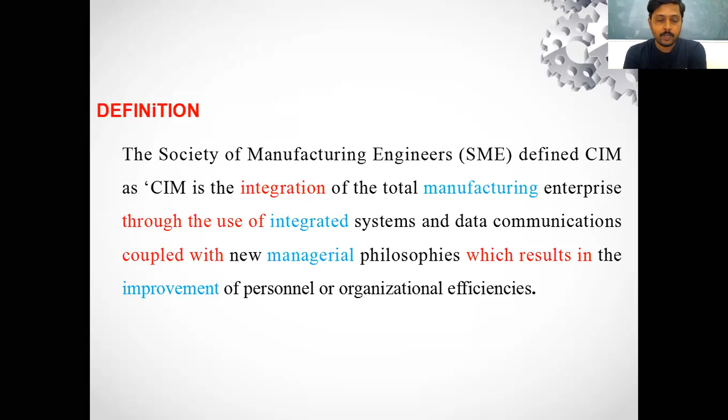So it depicts that it could be used in service industry also, not only in manufacturing industry. Personnel means the staff, working people in the industry. The efficiency of that personnel could be improved, or overall organization efficiency as a manufacturing unit could be improved. So this is the definition of CIM. If you understand this definition clearly, you are going to have a good knowledge of CIM and how to implement it.

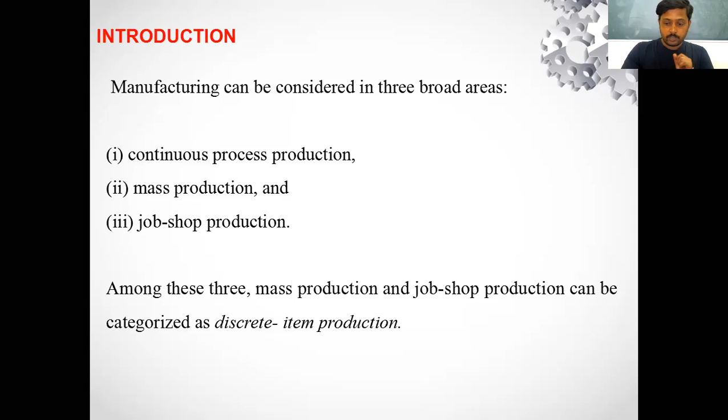Now let's move further. The continuous flow process cannot be automated fully. The first type, continuous flow process, cannot be automated fully, as it only consists of a small percentage of the manufacturing system. Keep this in mind. You can consider the batch production or continuous flow process system as a system which has a small percentage of manufacturing automated.

The second type, mass production of discrete items, is included in this category, where a segment of the production line is largely automated, but not the entire line. In the first case, a small percentage was automated. In mass production, a segment of the production line, which is more than a small percentage, is automated, but not the entire line.

Now in the third case, the job shop facilities have automated machines, but transfer of work among these machines is a difficult task. So we can say that job shop production can be totally automated from raw material to the finished product, but the transfer of work from one workstation to another is a difficult task in case of the job shop facility system.

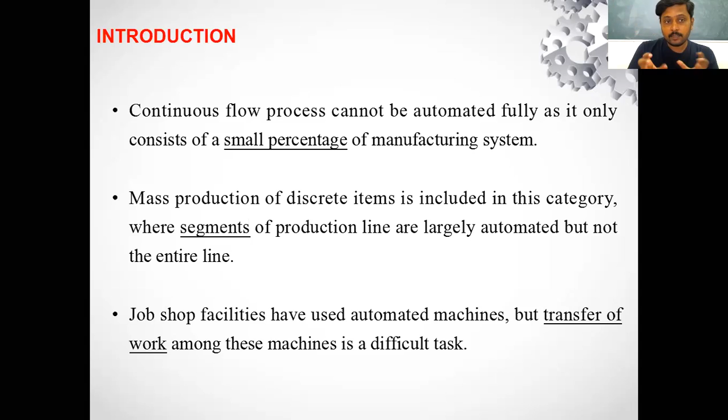So these are the three things you must understand before going to CIM. Now let us discuss the challenges faced by a manufacturing engineer while using these kinds of philosophies and techniques in his day-to-day work. As a manufacturing engineer, what are the three things you have to go through every day, or what are those challenges?

The first one is cost. The cost must be reduced. The second one is delivery time. The delivery time of product to the customer must be less. You can see the diagram over here. You are forced to stress upon improving the quality. As you can see the arrows here, the quality must be improved, the cost must be reduced, and the delivery time should be reduced. So these are the challenges for a manufacturing engineer.

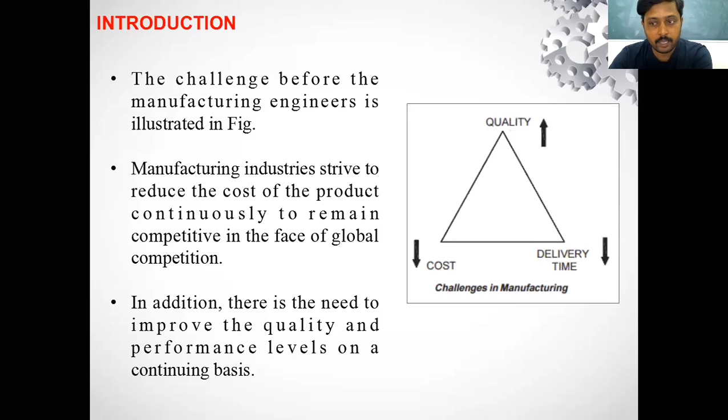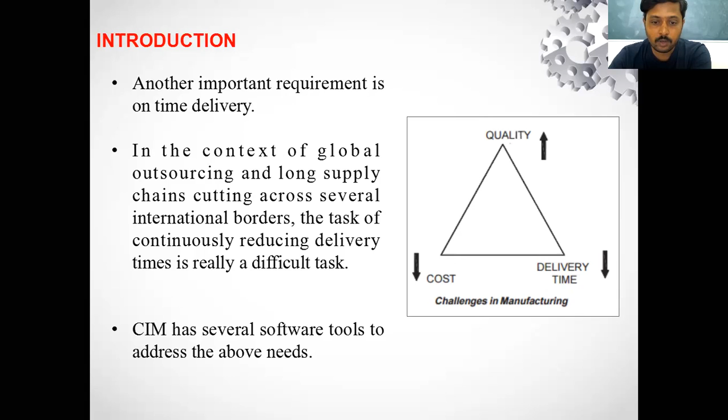This is just an explanation of what I have just told. Now, CIM has several software tools to address these above needs. So basically these three points are where we are going to focus to implement CIM, that is computer integrated manufacturing, by using several software tools. Now let's go in further deep.

CIM involves a fundamental strategy of integrating manufacturing facilities and systems in an enterprise through the computer and its peripherals. So we are going to use computerized systems and computer peripherals to integrate manufacturing facilities and systems in an enterprise. This also involves integration of advanced technologies in various functional units of an enterprise. So second, we have to integrate advanced technologies like CNC machine, DNC system, and so on, in an effective manner to achieve the success of the manufacturing industry.

Obviously any manufacturing industry will have the first and foremost goal of making profit. Every organization, be it a service sector or a manufacturing product sector, the foremost objective is to make money. So to achieve that objective, you should use these different types of tools, technologies, techniques, methods and philosophies so that your target is achieved. Now, a deep knowledge and understanding of all the technology is required for effective integration.

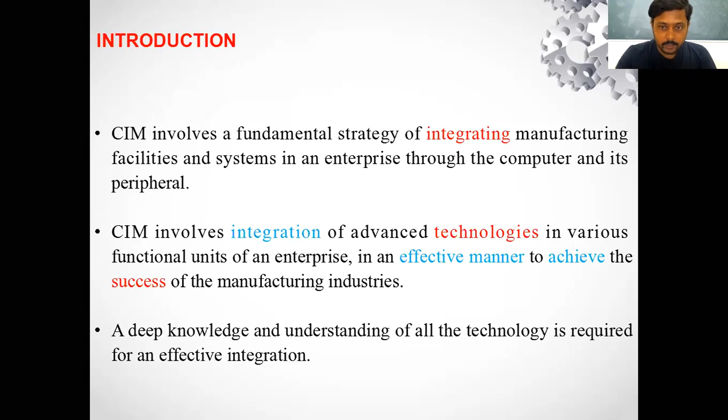If you are trying to implement CIM in your organization, and the person who is going to look after this does not know the details about the technologies used in the industry or how this new technology is being used, then it is very difficult to implement CIM in an industry. So deep knowledge and understanding of all the technologies we are going to use in the industry is very important.

Now, how we are going to implement CIM, we will discuss in brief. First, integration of advanced manufacturing technology, AMT, is required to get success in the application of CIM. So you must know what are the advanced manufacturing technologies right now in the market. Then computers will act as a subordinate to the technologies. The technology could be computerized, but the computers will be a subordinate part for that technology, helping it to proceed. They will also help to organize and restore information in order to achieve high accuracy and speed. So organization and restoration of information - computer integrated manufacturing totally depends on the data. What data you are going to provide for this particular system or technology is very crucial for CIM.

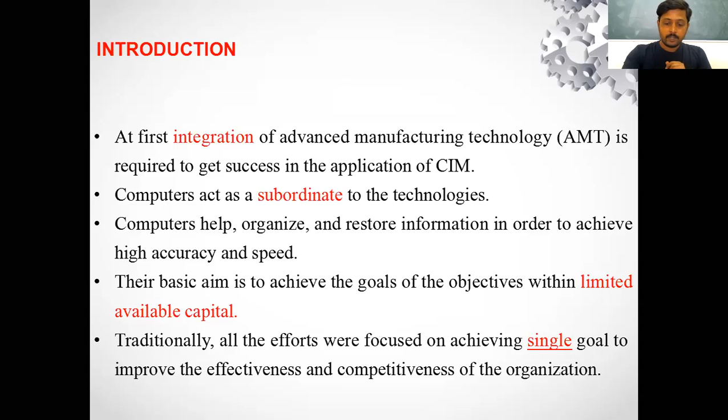Now, CIM basically involves the integration of advanced technologies, as we have discussed - CAD, CAM, CNC systems, robots, etc. Today, CIM has moved a step ahead by including and integrating business improvement activities, not just technologies, not just manufacturing or designing related activities, but business improvement activities. This is a management part of the total organization. What are those things? Like customer satisfaction, total quality management, and continuous improvement like Kaizen systems. These are management activities focused on improving the overall business function of the total organization.

Now these are integrated and included in CIM nowadays. Earlier, CIM was focused on advanced technologies and data processing, data communication, but now these management philosophies and business improvement activities are integrated in them. And how are they managed? They are managed by using computers.

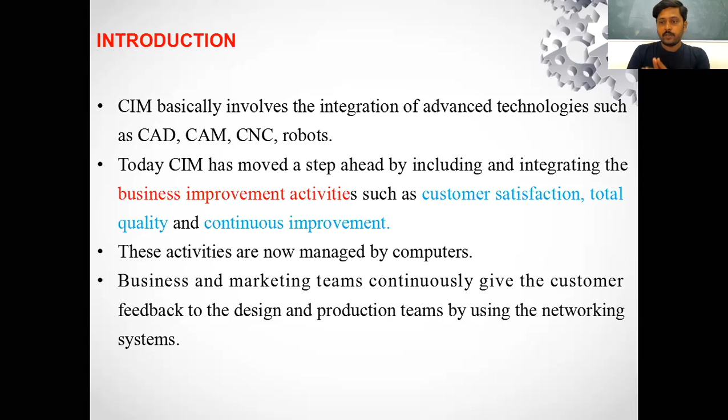Business and marketing teams continuously give customer feedback to the design and production team by using a networking system. This is a very important thing. Business improvement activities are related to business - marketing teams take feedback, giving sample products to customers or the target group. They test, analyze, and survey, collecting data by whatever means they can arrange. That data is given to the production team and design team so they can integrate that data into their system, conclude from it, and use those conclusions in the designing or manufacturing phase. This is how all these things work.

As I said earlier, the data or database is very important in CIM, computer integrated manufacturing, since it uses common database and communication technologies. Like on a shop floor, if you have 10-15 CNC systems and you want to communicate data from server to all these CNC systems, you must have some communication technologies. Now, why is this important, or what is the objective behind that?

To integrate design, manufacturing, and associated business functions. Three things: design part, manufacturing part, and associated business functions. That combines the automated segment of the factory or a manufacturing system or facility. So basically these three things are going to be combined using common database and communication technologies.

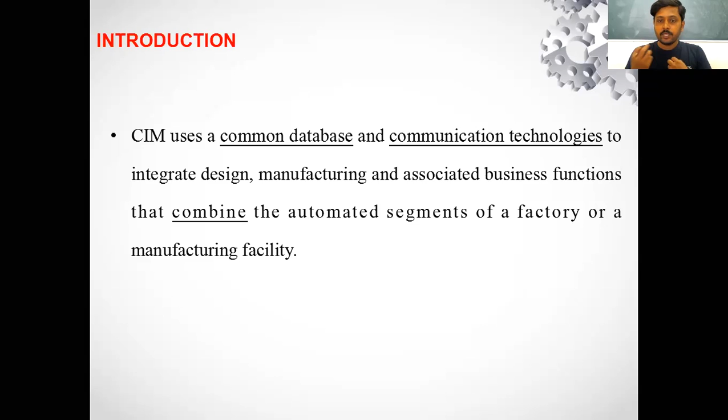Benefits of CIM. What are the benefits? CIM plays a vital role in the economy of the manufacturing system or enterprise. Basically, it is a very vital or crucial part of the improvement in the economy. If you want to improve the economical part of the industry or factory, it is very important.

The benefits are product quality improvement. Obviously, the quality is going to improve.

Shorter time in launching new product in the market. If your communication with the customer, since in the previous slide I discussed that the marketing team is going to make surveys and analysis and research on customer needs. They provide this data to you, and you integrate this data as a concluding part in the design. So you are making a new design, and whenever you make a new design, the new manufacturing and the new product is going to be launched in the market. Earlier, without using CIM, it was very difficult because there were no computers or these types of systems. So no feedback was coming to the design department, so they were only focusing on refinement of the current product. But now these things come as feedback, so they integrate new features into their product.

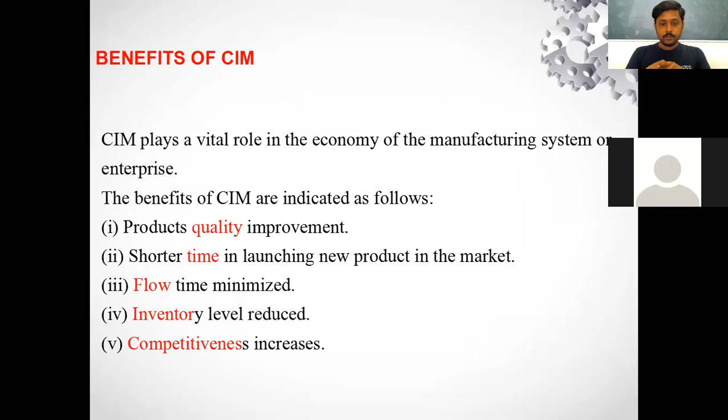Next advantage: flow time is minimized. Inventory level is reduced - the level of raw material, and whatever in-process material, that is another type of inventory, this level is reduced. Competitiveness increased, obviously, and improved scheduling performance. Scheduling is improved, vendor lead time is reduced, customer service is improved, flexibility and responsiveness is improved, total cost is minimized, long term profitability increases, customer lead time minimizes, manufacturing productivity increases, work in process inventory decreases.

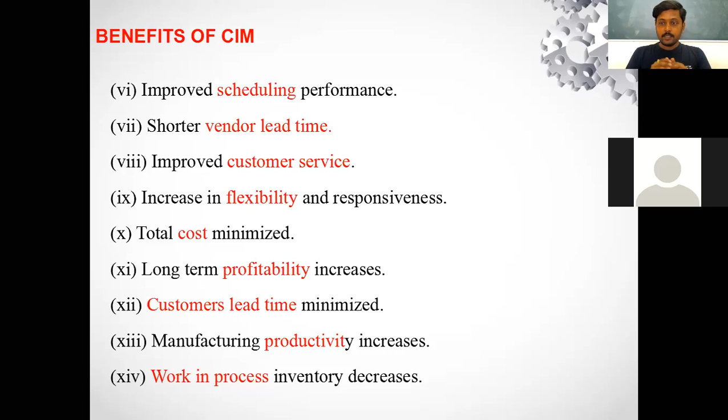So these are the benefits of CIM. If you want to write it statistically: 15 to 30% reduction in engineering design cost. That is not a very small amount for a big industry. 30 to 60% reduction in overall lead time, almost 50% if you take an average - 40-50% lead time is reduced. Gain in overall production is 40 to 70%.

Quality improvement - see the quality improvement by using CIM. It is minimum 200% to 500% in quality improvement. This is outstanding, right? 30 to 60% reduction in work in progress. So these are the statistical information of benefits of CIM.

By using CIM, you can achieve this. That is why it is very important that a mechanical engineer must have this knowledge of CIM before going to industry. That is why this part is included in your syllabus.

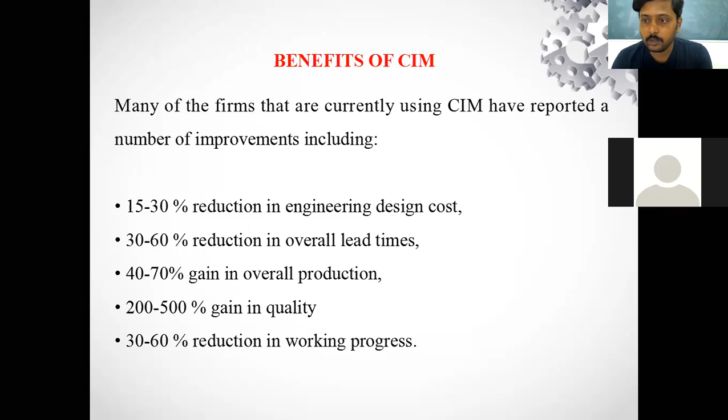Now we will stop here because the time is over for this particular lecture. We will start with hardware and software of CIM in the next lecture.